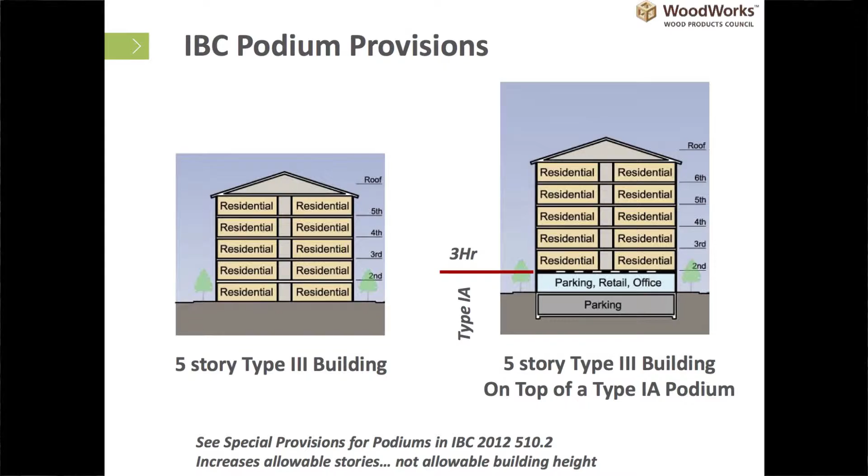It's a little technical, but if there's architects and engineers in the room, you know these terms, but I'll just hit it really quickly: wood can really go up to 5 stories of residential, 6 stories of office in Type 3 buildings. What is happening in the codes is now you can put this on top of basically another building. A podium is what it's referred to as, which is a Type 1A building. So you have a podium that's separated by a 3-hour fire separation, and then you put the wood building on top of that podium. So we've probably seen that around. I'm also talking about IBC, which is a little different than in New York. It's a little different code, but this is generally in most places what is happening.

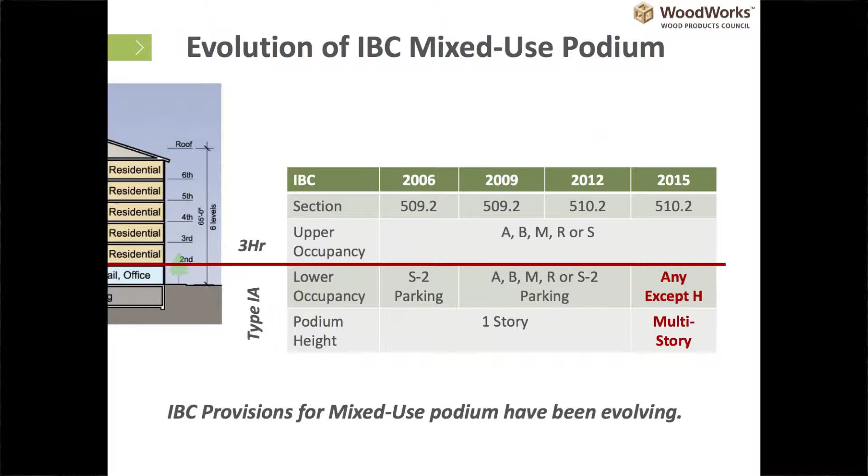So if you have the next slide, one interesting thing in the codes is that 3-hour fire separation is getting to be less restrictive, is probably a better way to say it. It used to be only 1 story. Now you can have more than 1 story. It used to be only a few occupancies below. Now you can have multiple occupancies. And then above that, you can have a wood building that's various occupancies.

There's still height and area limits that these buildings fall into, so you can't just build as much as you can imagine building. There's still definitely height limits, depending on if it's sprinklered and the other fire protections that you put in place, up to 85 feet, or 65 feet to the mean roof there. So that's generally the way that works, with a podium.

So I'm going to just show you an example. This building is in Seattle. It's actually 8 stories when it really comes down to it. So if you hit the next slide, it kind of goes through the animation. Here's ground level. Hit it again. And you can see above the podium, and just keep clicking through. Basically, you've got 5 levels, plus there's a mezzanine on top, which is kind of like the 6th level above

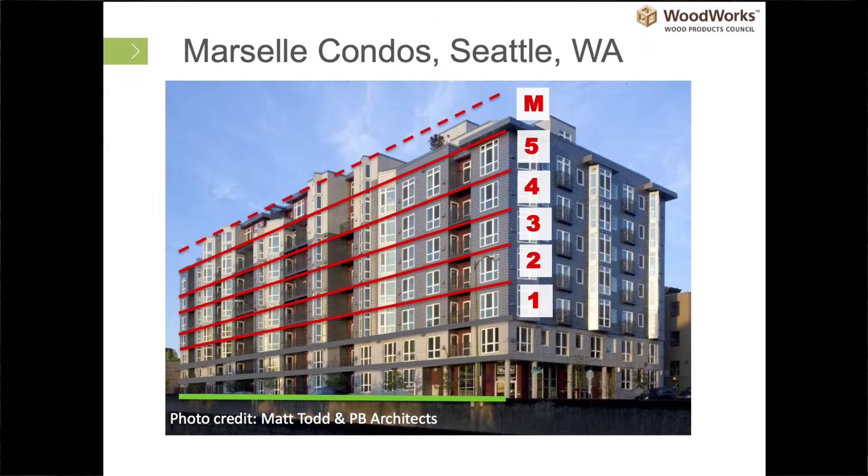a 2-story podium. So Seattle's been doing this before the 2015 code came out, and this is what we were seeing over and over. Again, this is stick building, so it's not in the mass timber yet. So we're seeing a lot of this type of construction. The upper end of the mid-rise is what we see all the time.

So when we move beyond stick building and light frame, we saw a good example of Michael Green's building, a post frame construction. Post and beam has been around forever. People have been building large structures out of that for hundreds of years, just not necessarily the way we're used to building today. And then these mass timber technologies really come into play and really help us expand beyond what we just saw in those mid-rise buildings.

So if you hit that again, we've talked about a lot of the reasons why. Certainly if this is a sustainability forum, talking about the sustainability aspects, we've talked a lot about what is listed here around sequestering carbon. Some of the other things that we haven't really talked about is the fire resistance of these materials. The reason you can go bigger is because you have a charring effect that happens if there is a fire, so the wood is protecting itself just like a log in a campfire.

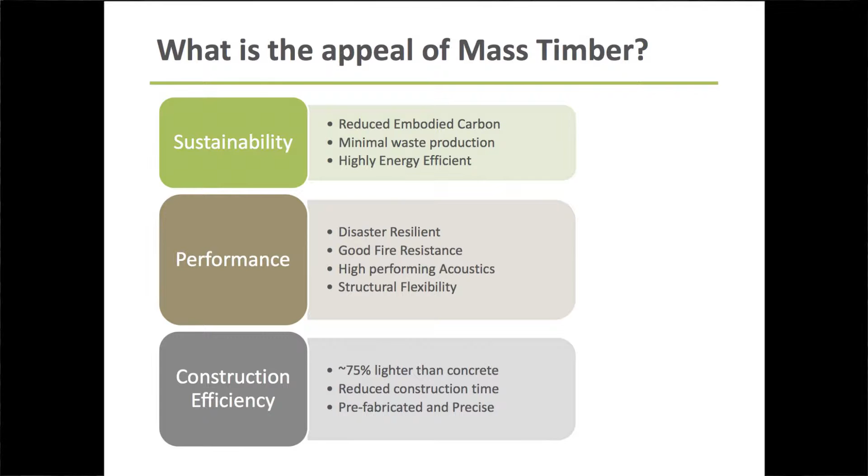Also, from an acoustic perspective, it works out quite well. And structural flexibility: you can design these technologies to fit the part that you have. One other aspect that really doesn't get mentioned as much is that it's so much lighter. A lot of the buildings that have been built of mass timber around the world are there mostly because of site soil conditions that wouldn't allow another building to be built there. It's so much lighter, and it translates throughout the entire structure. So when you think of seismic design, the heavier it is, the more forces you have to deal with. With these technologies, the equations are just way different because of how much it weighs.

And the other piece is construction time. We're not waiting for something to dry. We're screwing it together and moving up. And that construction cycle time can really lead to very cost-effective projects, certainly as we get into 10-story buildings, where concrete isn't necessarily as efficient because you don't get to reuse your forms that much. And then the prefabrication piece really allows for a very efficient supply chain, and in the end, this construction efficiency for developers is really dollars in your pocket.

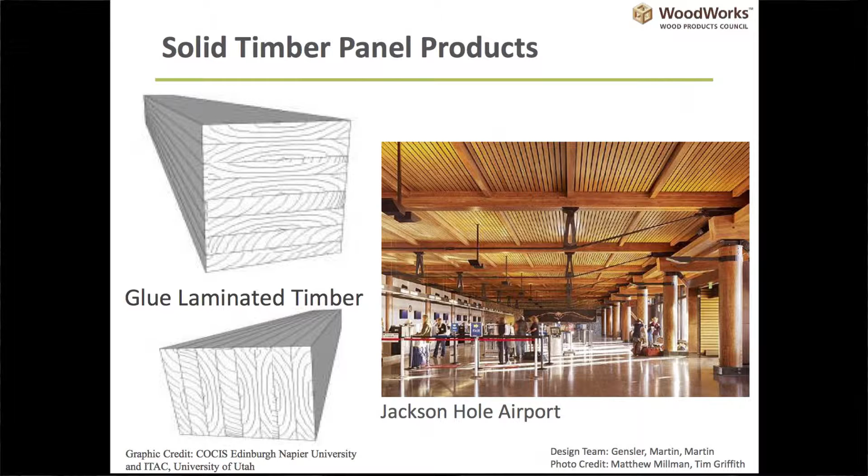So I'm going to just hit a few of the projects that have happened with these various technologies rather quickly here. Certainly glulam; glulam is in a lot of these pictures of post-frame buildings. This is Jackson Hole Airport. Normally you think of glulam stacked vertically as a beam, but there are some mass timber buildings where it's actually rotated on its side and used as a panel, because it's built that way to begin with as a big sheet. You put a wood structural panel over top for your diaphragm, and you have a mass timber building. We don't need to build plants to build this stuff today. There are glue laminated timber facilities all over the U.S. and Canada.

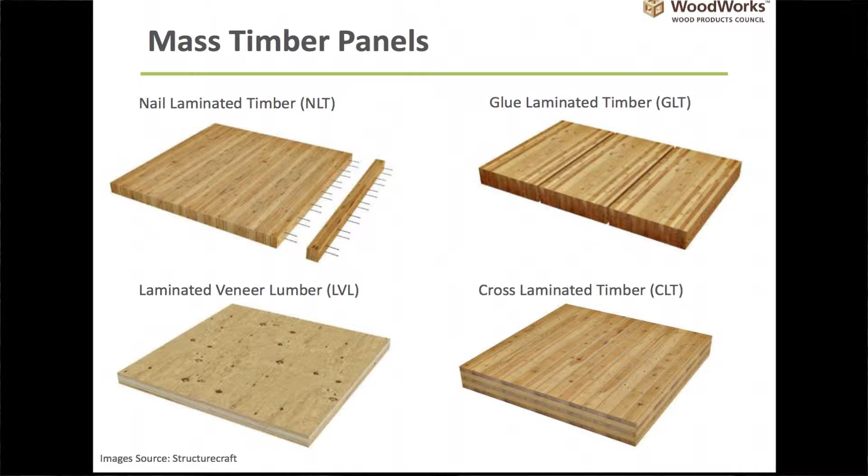So let's move on. When we get into the panel products, it's almost the same. I'm pretty sure it was the same source as Michael's slide. We've got nail lam, which we've talked about a little bit. It's just 2x6s, 2x8s nailed together. We've got glulam again, the panel side of that, basically glued together instead of nailed together. And then we've got LVL, which is a peeled part of a log, peeled and then glued together in thin strips instead of bigger chunks. And then cross-laminated timber. So I'll show you some examples of these different structures here.

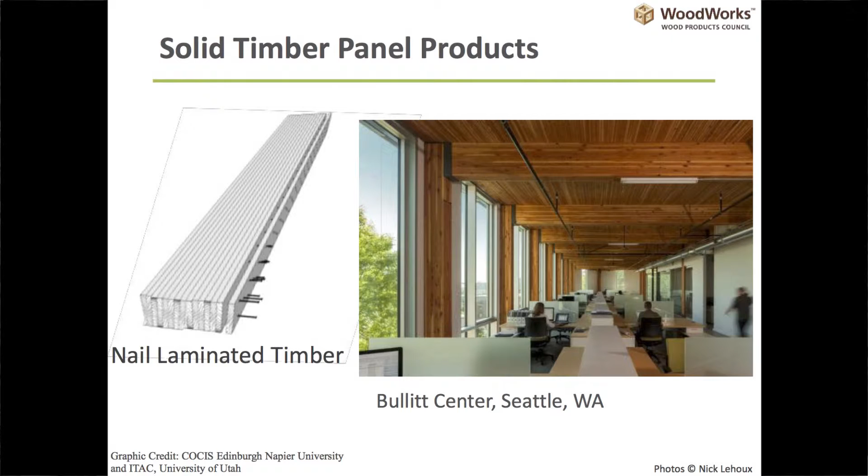Nail lam, one of the first ones, maybe it's the first, everyone says they're the first, but the Bullitt Center in Seattle has a nail lam floor. Glulam is the beams and the posts and beams there. We'll go through these kind of quick.

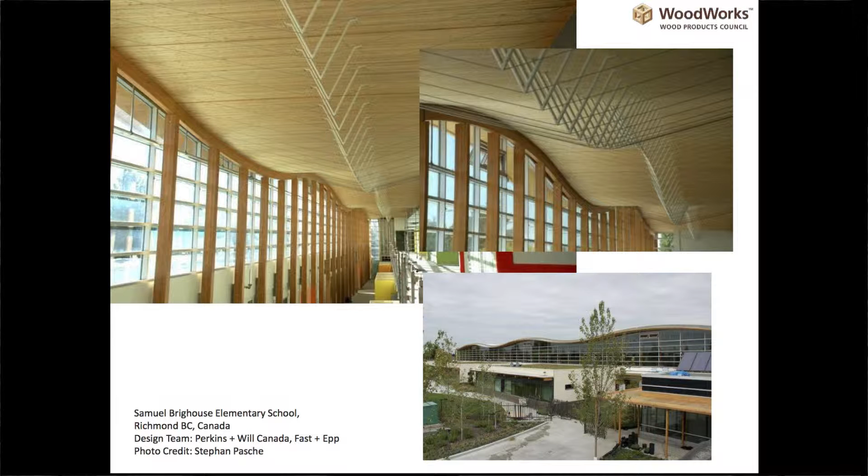Here's another example of nail lam. You could see that because I think this one was built on site, so they could actually do this curve as they went through. So these are trusses with a king post, but really elegant structure.

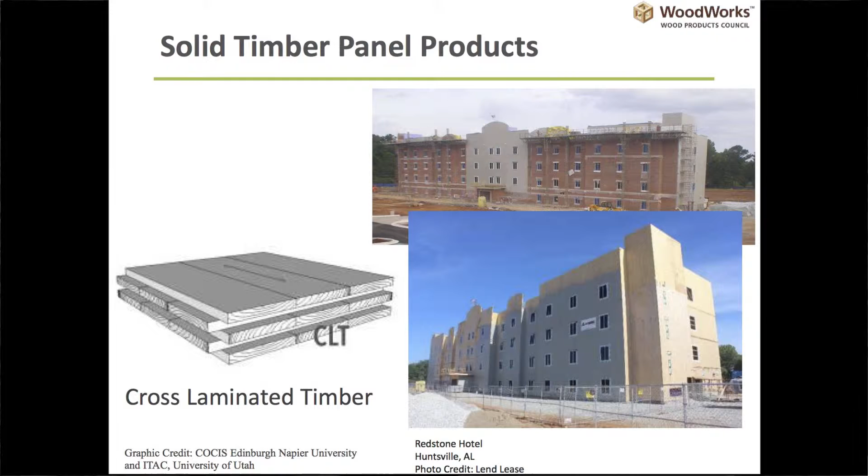Let's go to this, this is cross-laminated timber. We talked a lot about what it is, but really it's like, they say that basically it's like if plywood and a glulam had a baby, what you get is that you have alternating layers that are actually bigger chunks of 2x6, 2x8 construction. And this is the Redstone Hotel, one of the first hotels on a military base made out of CLT construction.

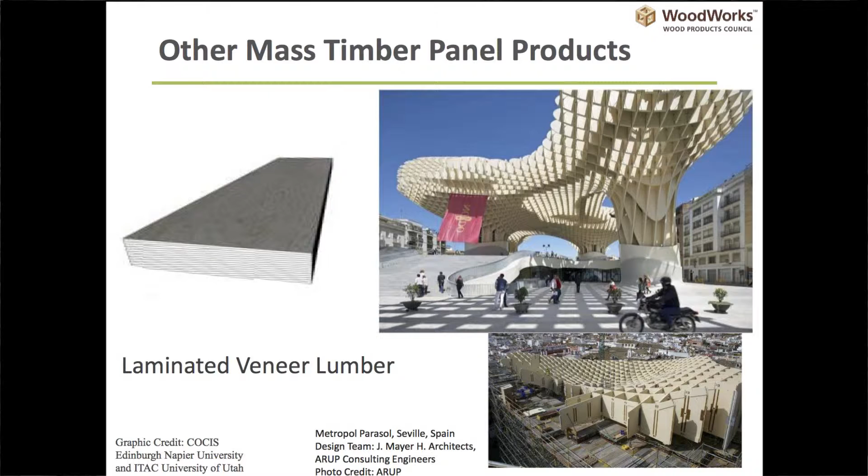You've probably seen pictures if you've been around wood at all of this project in Spain, but it's actually laminated veneer lumber, lots of different uses for this, and I didn't want to use one of Michael's buildings, so I found a different picture for that. But this is very versatile and used quite often in mass timber.

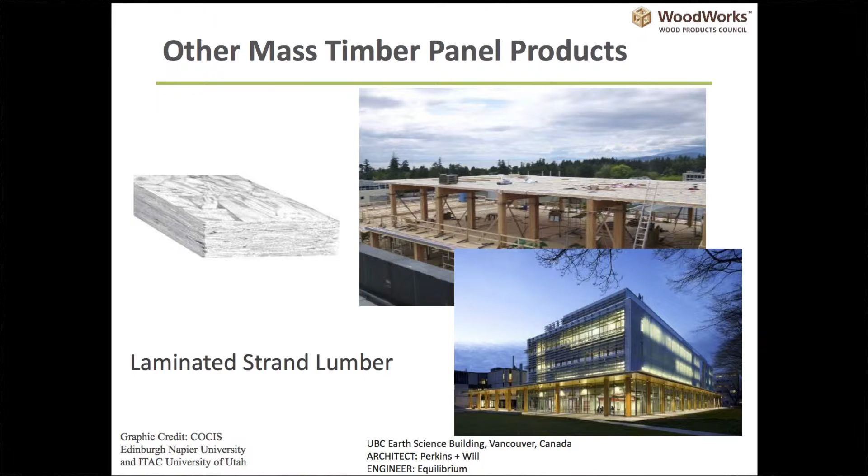I think about one more, which is laminated strand lumber, which is a whole other technology, where the tree is flaked, made into long strands, glued back together, and you can have large panels. Most of these, the LVL and laminated strand lumber, are all made in billets to begin with and then cut down for little window headers.

So we're not necessarily leveraging those technologies today. There isn't a lot that needs to be done to turn those into mass timber because they already are mass timber. We just use them as little tiny pieces. So there's some interesting things going on with these other engineered wood products.

And then there's a whole composite side, because there's pieces of this where wood can definitely fit a role, but also as we go into other structures, there's composites being used different ways to get composite action between some concrete and a lot of wood. A good example of that is the LCT One tower. That's 8 stories. And then there's lots of other really innovative things happening. You know, elevator shafts made out of wood, certainly the TREET project, where it's a totally different mass timber system.

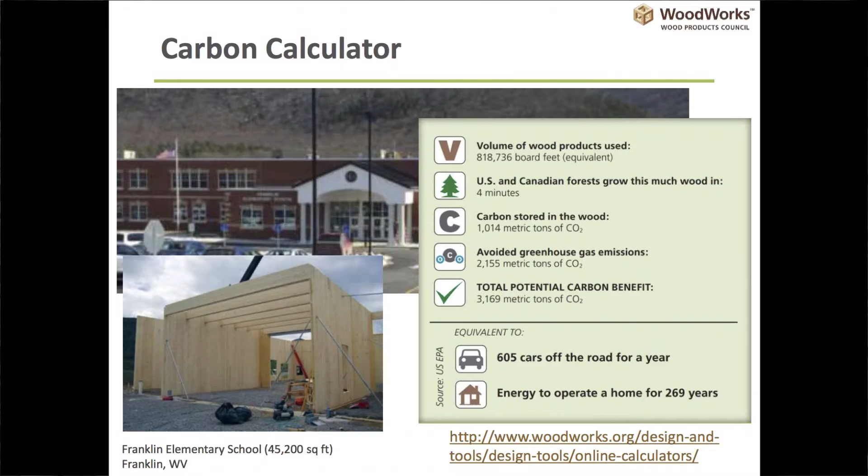It's included in all of our case studies on our website, and you can see with the bottom line there basically that this is equivalent of 605 cars off the road for a year. Just in the structure, it's a 45,200 square foot school structure. So there's lots of applications that don't require you to build the biggest building you can imagine.

It can be done today with 400 million square feet of construction that is viable for wood in the U.S. That's just the one-story opportunity that really is not made of wood today. So mass timber is an element of that, as well as lots of other types of wood construction.